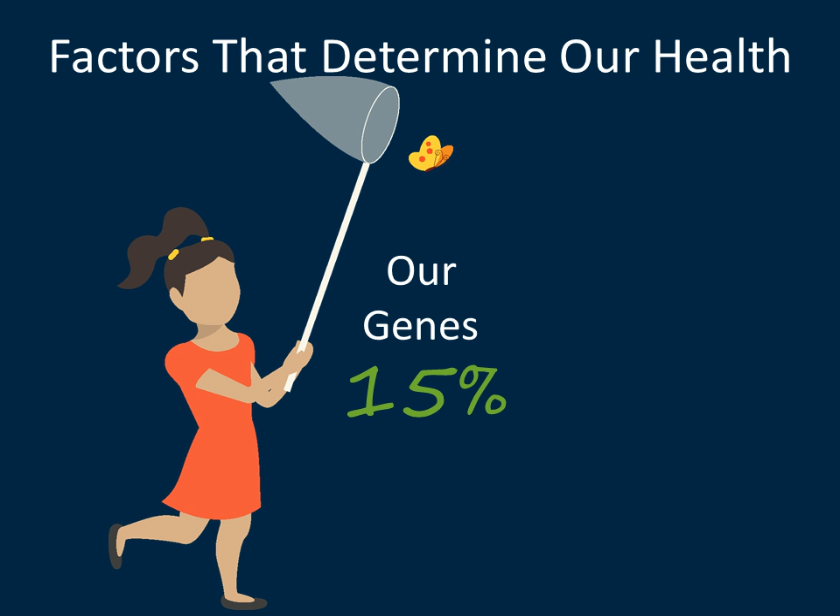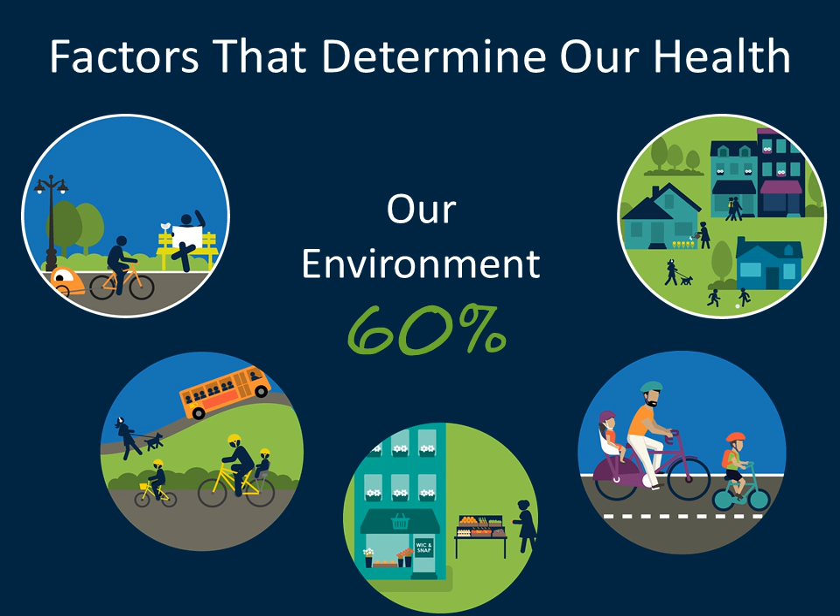When we think about the factors that determine our health, we often think that our genes are largely responsible for our health, but our genes are only responsible for 15% of that which determines our health. However, the environment is responsible for 60% of that which determines our health. Our physical, social, political, and economic environment greatly determines our health. Therefore, our environment greatly shapes our overall health, and complete streets improves our health.

So what is a complete street exactly? Well, in its most basic form, a complete street provides a safe, comfortable place for all road users. So let's take a look at a few examples.

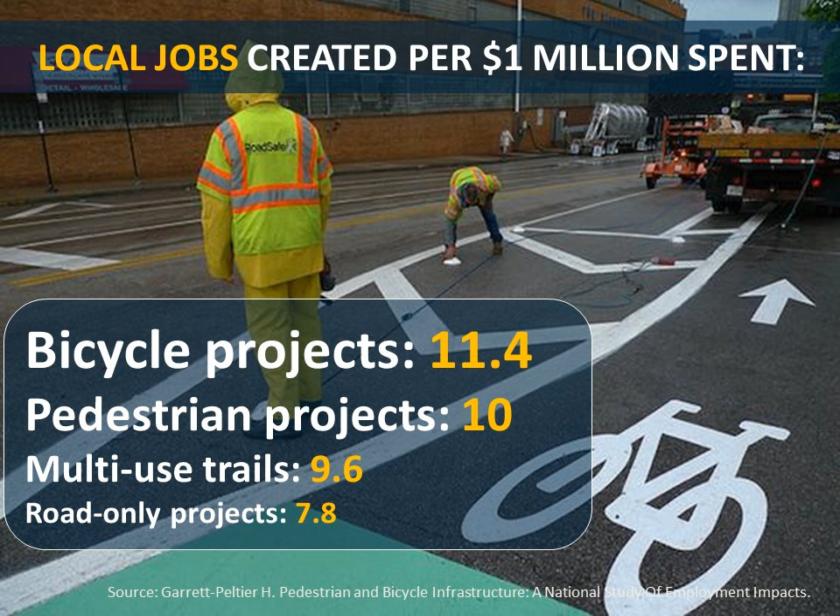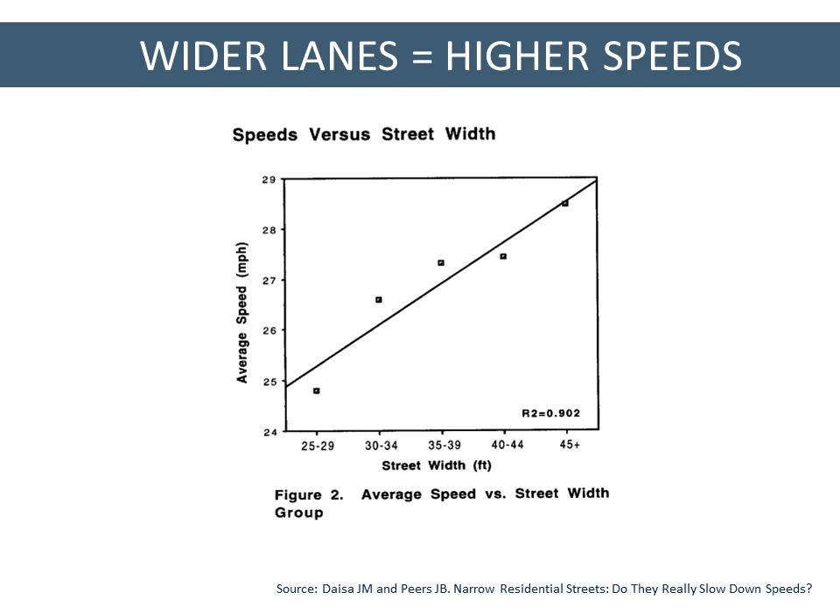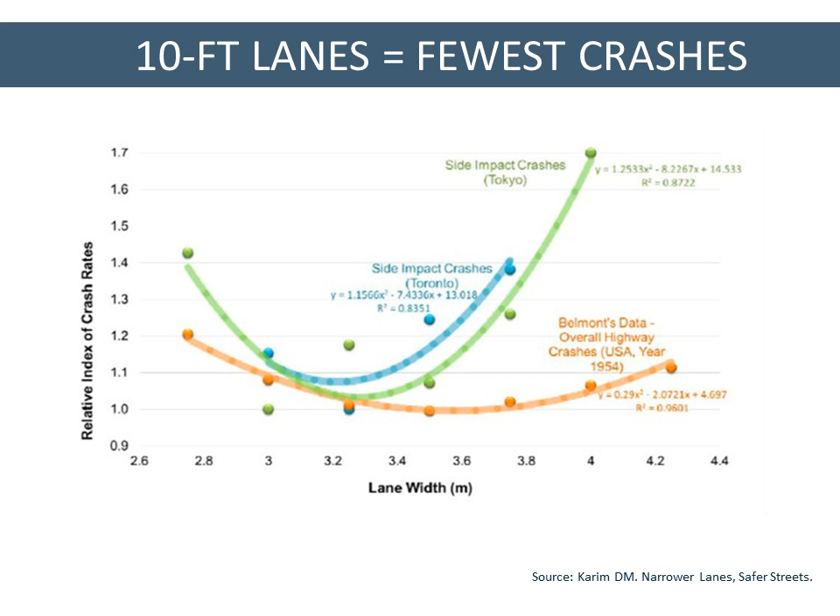Research has also demonstrated to us that wider travel lanes equal higher speeds. In fact, research completed last year demonstrated that about a 10-foot travel lane experiences the fewest amount of collisions.

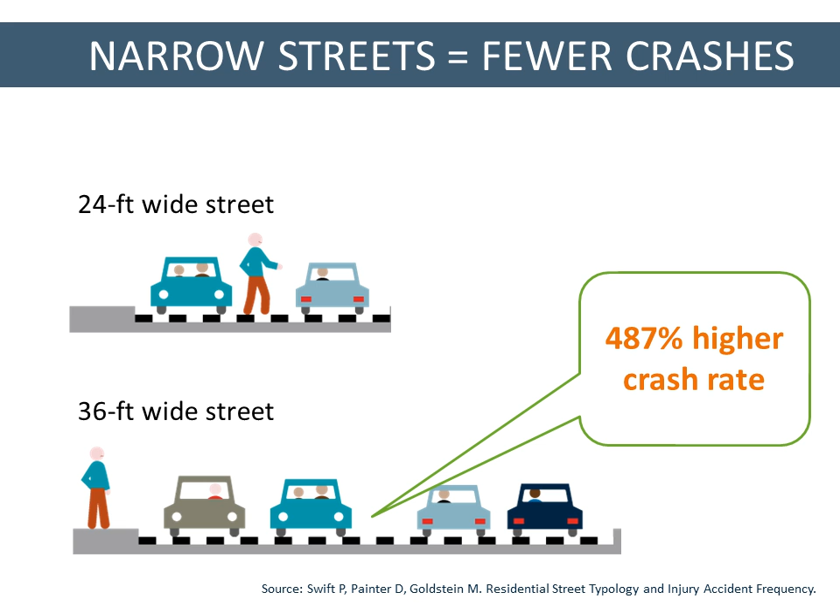Another research study demonstrated that narrow streets also experience fewer crashes. And narrow, slow-speed streets are much safer for people who are trying to cross the street. And I know this very well because I have to cross a 4-lane road every single day when I'm going to work, and it is very challenging to cross that street.

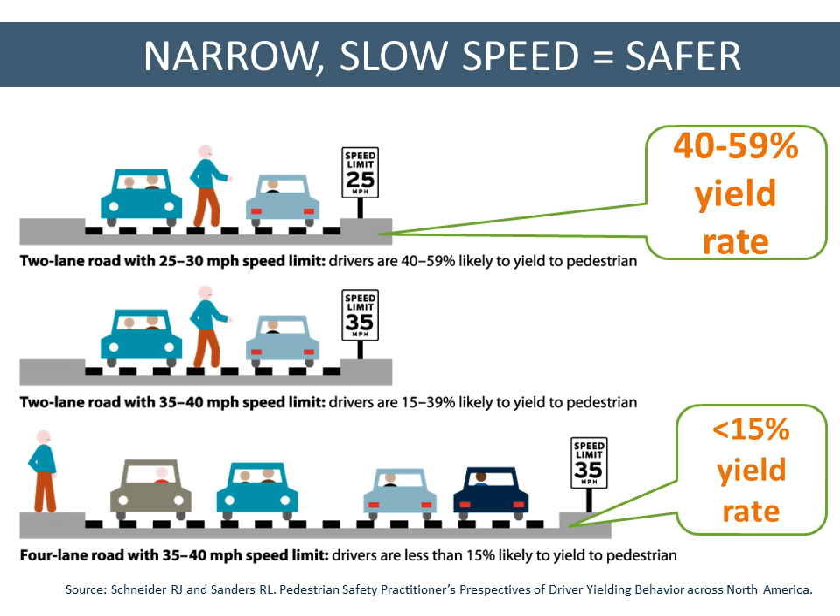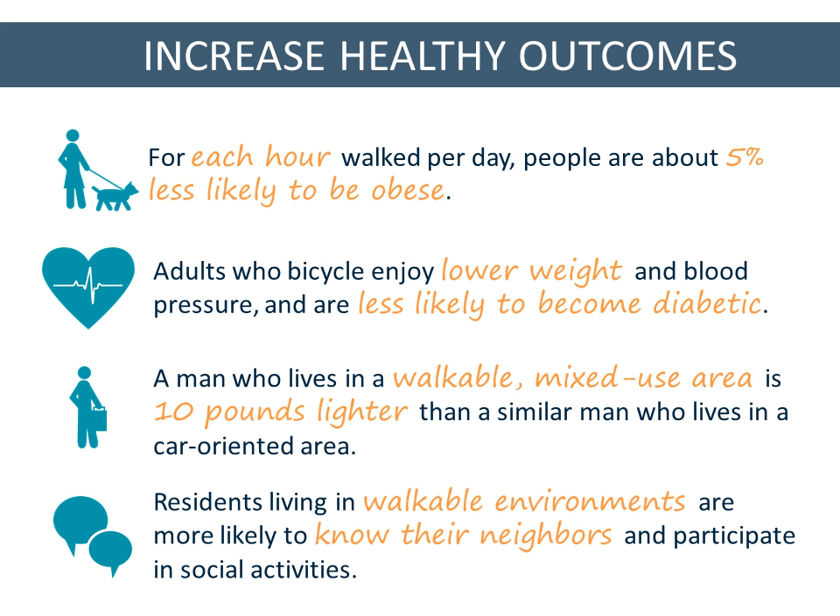Complete streets increase healthy outcomes. If you create an environment that is safe and comfortable for all road users, then people will walk more, bike more, and hence are less likely to be obese or diabetic.

As well, complete streets also benefit people who use transit. And about a third of people who use public transportation to commute to work meet their daily requirements for physical activity simply by walking to and from the bus stop.

Our street network affects our health in very deep and real ways. If you live in an area that has a well-defined grid street network, you are less likely to be obese, have high blood pressure, or heart disease.

Complete streets really is not a one-size-fits-all solution, as we described in previous slides talking about context. It's really about figuring out what is necessary for that particular street in that particular neighborhood. So before I turn it over to Eric, I'm going to briefly talk about Complete Streets policy.

So what do we mean by policy? In general, policies are binding, they're written, and they apply throughout the community. When we look at Complete Streets policies, we most often see them in the form of resolutions, local ordinances, as well as in zoning language, such as requiring bike lanes or a particular width of sidewalk. This is where zoning language becomes very important with regard to complete streets.

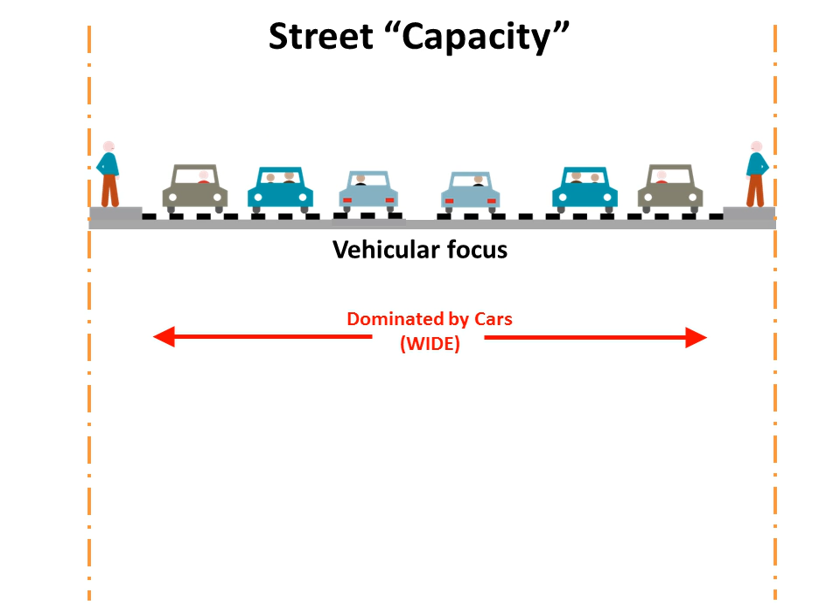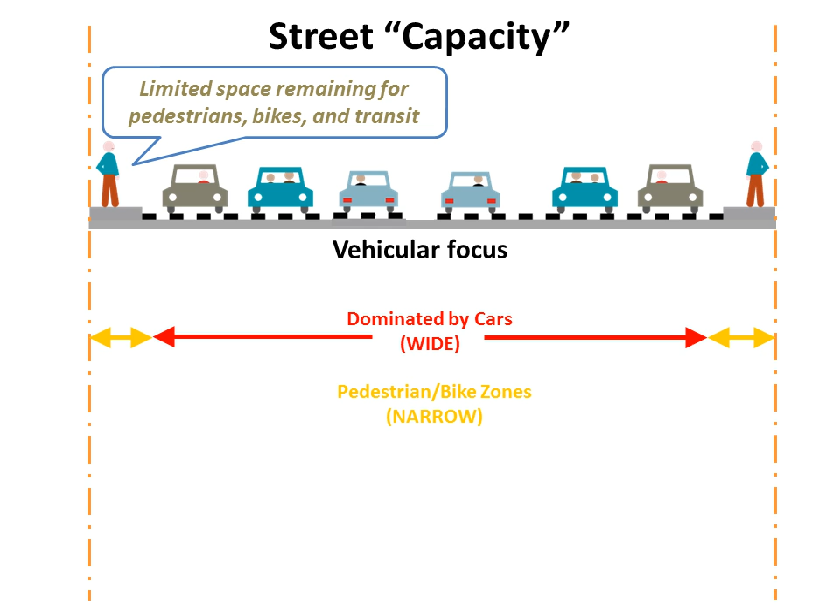Ultimately, though, how many cars a street can accommodate is limited by how much space is available within the right-of-way. So when the focus is on vehicular capacity, that street space tends to be dominated by cars, and the space left over for pedestrians, bikes, and transit is small and squeezed into the remaining space after those cars have been accommodated.

When walking and biking is given a low priority in this way, the pedestrian and bicyclist experience is poor. At a minimum, the facilities are limited and the experience is uncomfortable, and at worst, the facilities are non-existent and the experience is dangerous.

Auto-dominated streets also encourage high speeds and are wide with long crossing distances. As a result, vehicular-pedestrian collisions are more likely in these instances, and we just heard from Diane how high speeds increase the danger of those collisions.

So with complete streets, we look at street capacity differently. We focus on how the street can accommodate all users and modes of transportation within the right-of-way and the space available, and not just cars.

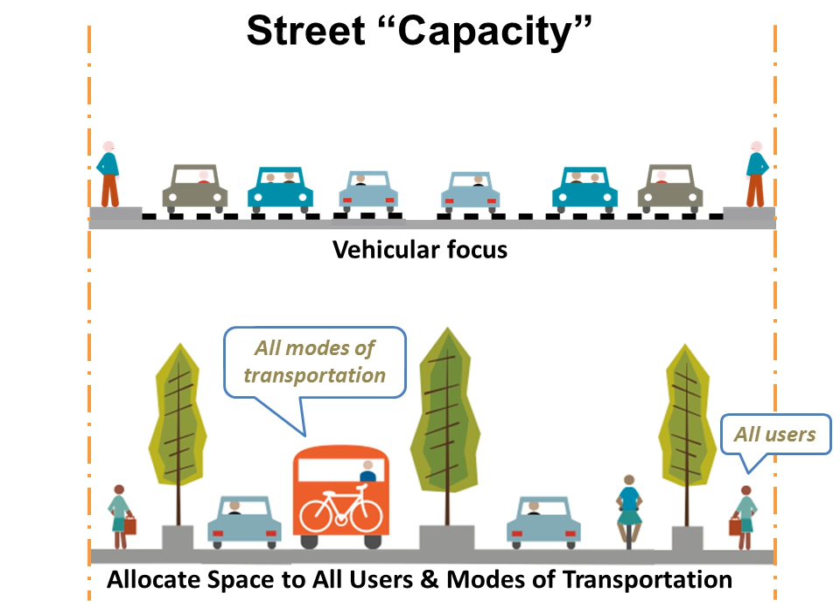So how do we rebalance street capacity to do a better job of accommodating all users? Well, one major way is to reconfigure streets to take some of that capacity away from the cars and reallocate it to other users. We can do this by narrowing or converting travel lanes or parking lanes, and then using the space we free up for improvements such as wider sidewalks, bike lanes, or transit-only lanes.

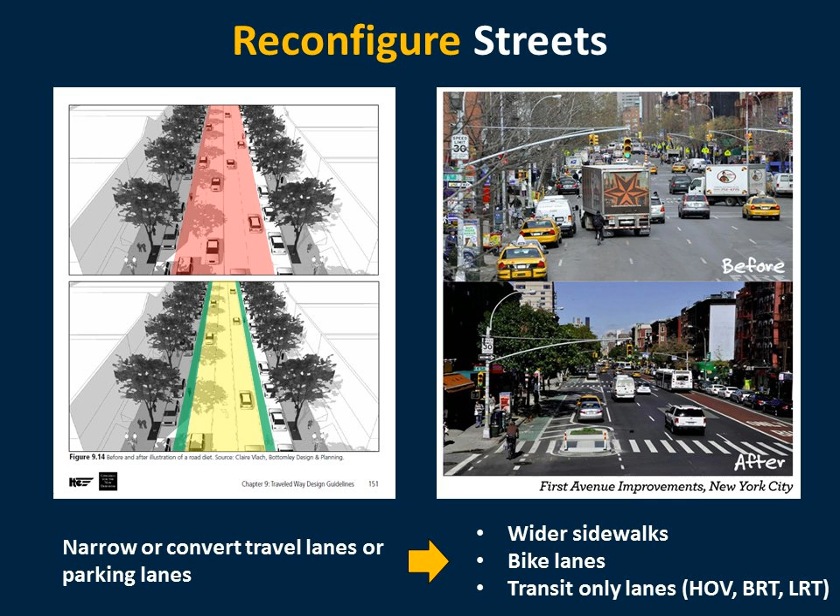And we can see here some examples of before, where we have a completely auto-dominated street, and then after, when transit lanes and bike lanes have been added with some of that auto capacity converted.

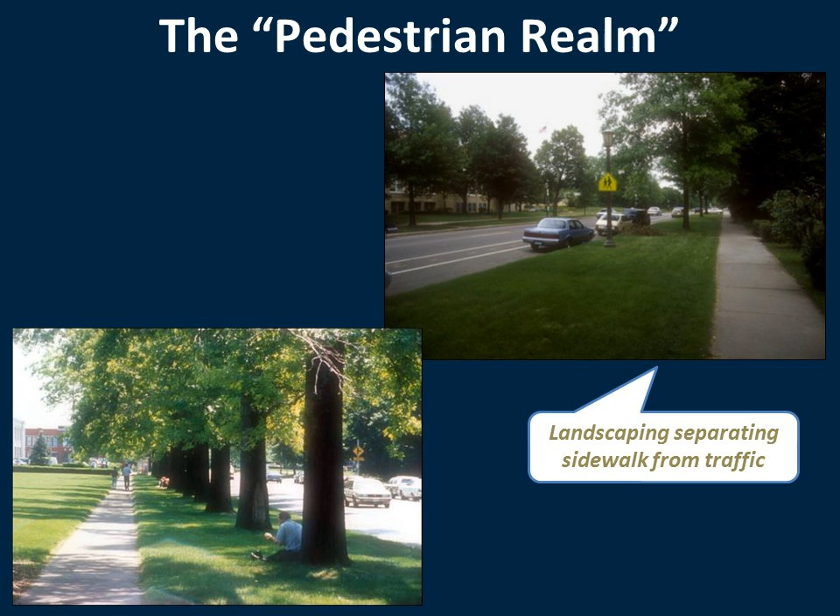Now, whether we reallocate space or not, we can still upgrade streets to improve the experience of various users. For pedestrians, we can do that by creating buffers between the sidewalk and the roadway using landscaping. The greater the separation and the more significant the landscaping, the more of a buffer is created from vehicular traffic.

In more urban locations, the physical separation isn't as large, and in those cases, on-street parking and wider sidewalks, which accommodate more pedestrians, can be used.

Along the most activity-oriented retail or commercial streets, the sidewalk should run closer to buildings to allow pedestrians access to shop front windows and entrances. The sidewalk should also be much wider in these cases to allow the greater number of pedestrians to easily pass each other. Street trees in these locations should be in grates so that the landscaping doesn't cut street parking off from businesses, and those trees generally should have higher branches to allow easy views of shop fronts from the roadway.

The pedestrian realm should also include a variety of amenities, including seating, trash receptacles, pedestrian scale lighting, and human scale details.

Crosswalks are also an important part of the pedestrian experience. Designs for crosswalks should consider locations that make it easy for pedestrians to get to their destination. This includes mid-block crosswalks, especially along streets with long blocks. Crosswalks should be detailed to be highly visible to all, guiding pedestrians to safe crossing locations and alerting drivers to be aware of pedestrians. Treatments include striping, which could be standard or more decorative paving details, signage, and lighting, such as in-roadway flashers.

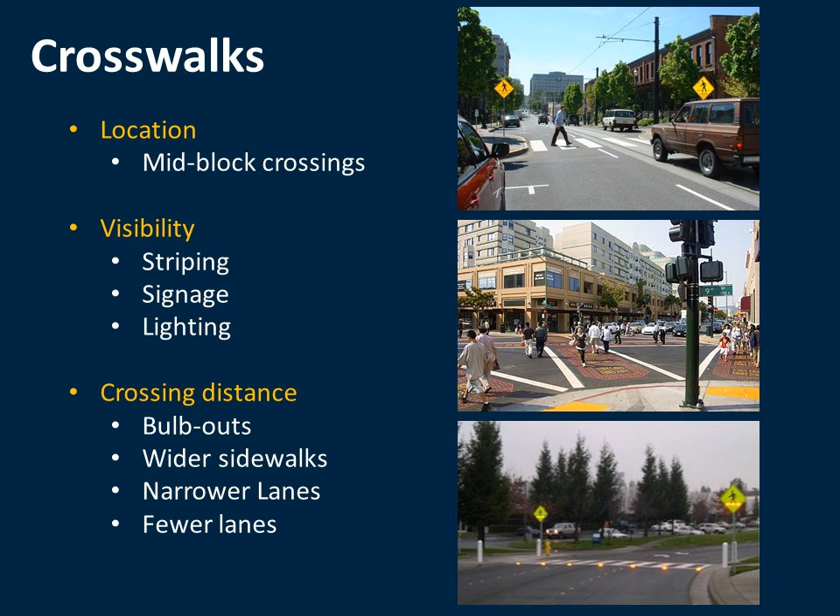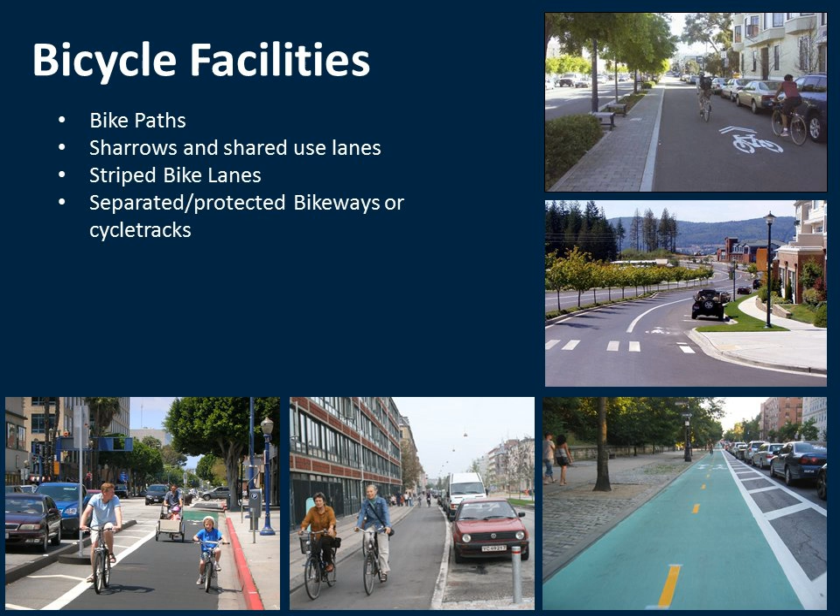Sidewalks are common, but many streets lack adequate bicycle facilities. The equivalent of sidewalks for bicycles include lanes shared by both bicycles and cars, typically indicated with sharrows, striped bike lanes, and protected bikeways, also known as cycle tracks and bike paths. These final configurations create a safe and comfortable bicycling experience by placing wide striped zones, parked cars, curbs, or landscaped medians between the bike lane and adjacent car traffic.

Like cars, when you're out on a bicycle, you want to have somewhere to park when you get to your destination. Bike racks can be strategically located along the curb on sidewalks, and they can also be located in street parking lanes, trading a single parked car for multiple bike racks.

As far as transit, for people to be motivated to use transit other than driving, the transit experience must be convenient and appealing. This includes safe and adequately sized amenities such as bus shelters and benches where users wait for transit. It also includes transit-only lanes for buses, bus rapid transit, or light rail, and these dedicated lanes allow transit to move more quickly and efficiently, making timetables more consistent and reducing travel times.

Now, even when accommodating other users, streets must still accommodate cars, and that means providing places to park. This isn't a bad thing, as we've seen how on-street parking can create a buffer for pedestrians. It also generally acts as a traffic calming measure.

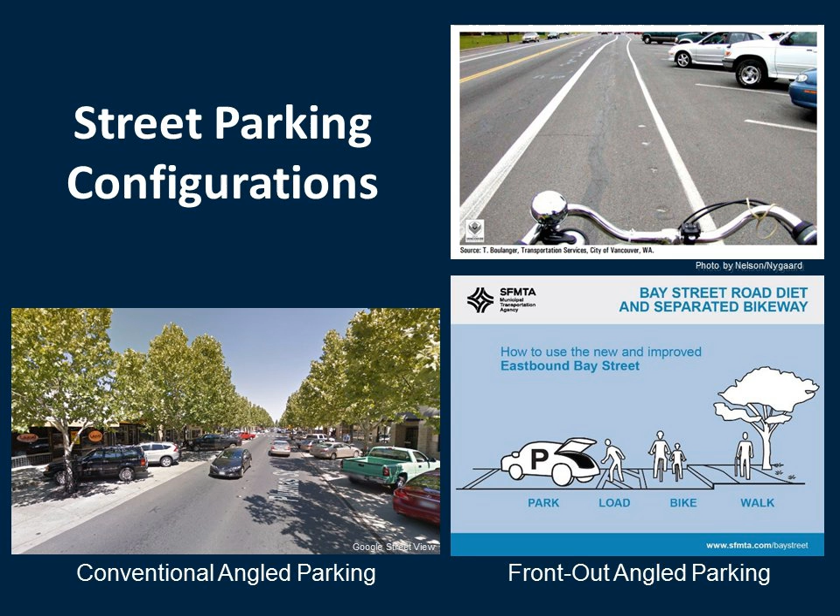Parking can be provided in a variety of configurations, including parallel parking and angled parking. Angled parking is generally easier to navigate, but it can also be a source of collision for drivers backing out of spaces. So more recently, an alternative to conventional angled parking is back-in, also known as front-out angled parking. This configuration has lower collision rates than conventional angled parking because drivers have much better visibility of other cars and bicyclists when pulling out of spaces.

Now, beyond reconfiguring streets to shift capacity from cars to other users, vertical streetscape elements such as trees and streetlights are the most powerful tool to shape the street experience.

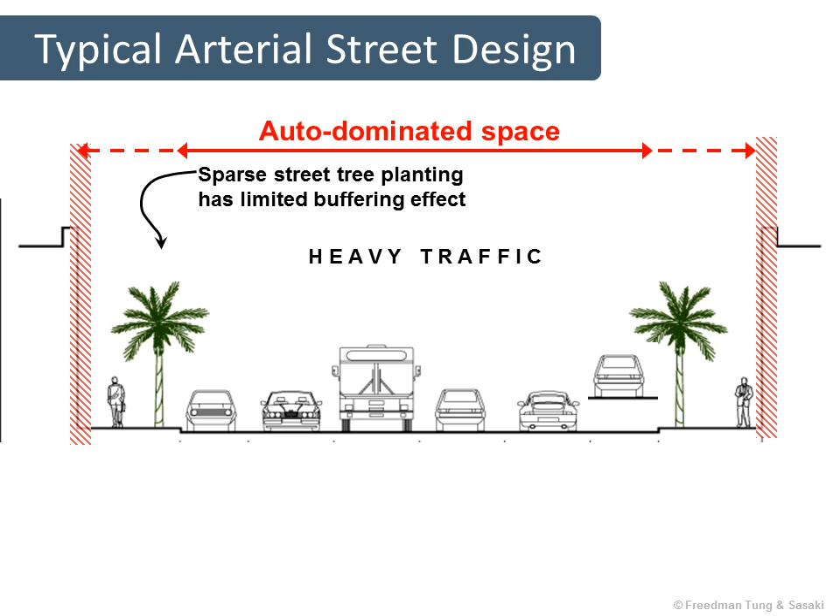This is because when streets lack vertical elements, there's nothing to visually define the space of the street or provide a buffer for pedestrians. So the result will be a space that feels very wide, especially if buildings are low and significantly set back from the roadway.

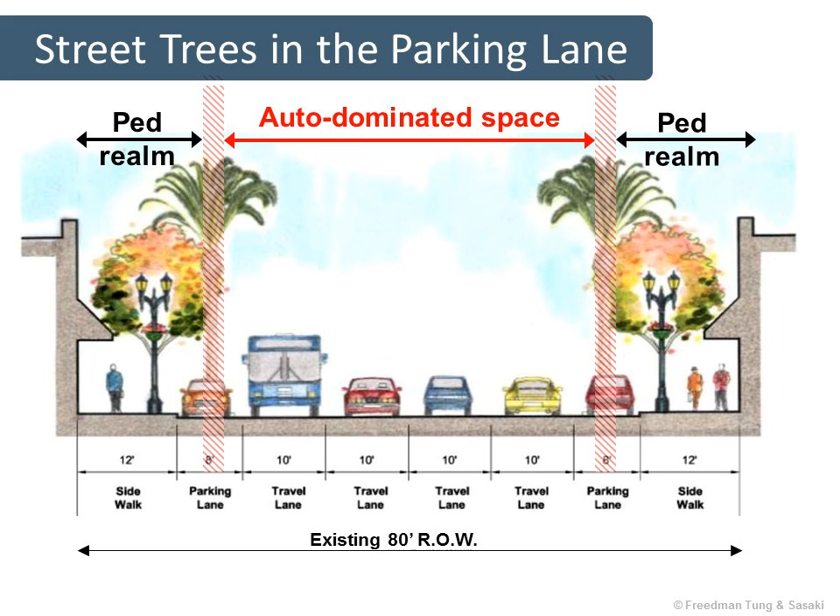Adding substantial vertical elements within the street will change the perception of the roadway even without reconfiguring the space. You can see that this roadway feels wide and the pedestrian space feels squeezed. And here, after placing street trees in the parking lane, it completely changes the perception of the street for the pedestrians, and for drivers as well.

Now, placing trees or streetlights in parking lanes is important to remember, it requires curb islands to help prevent cars from accidentally running into them while parking. And this can work with angled parking as well.

Streetlights can also create this effect, but it's generally not quite as powerful. To be effective, streetlights must be placed closer together.

Another place verticals can have a significant effect is in the center of the street. Wide multi-lane streets often have continuous center turn lanes. Replacing a center turn lane with a landscape median creates a dramatic transformation.

Landscape center medians also create safer streets. They reduce collisions by reducing conflicts caused by turning vehicles, and the visual narrowing contributes to slower speeds. Note that some transportation departments have standards for the placement of vertical elements close to travel lanes and near intersections, due to how they affect the visibility of oncoming traffic.

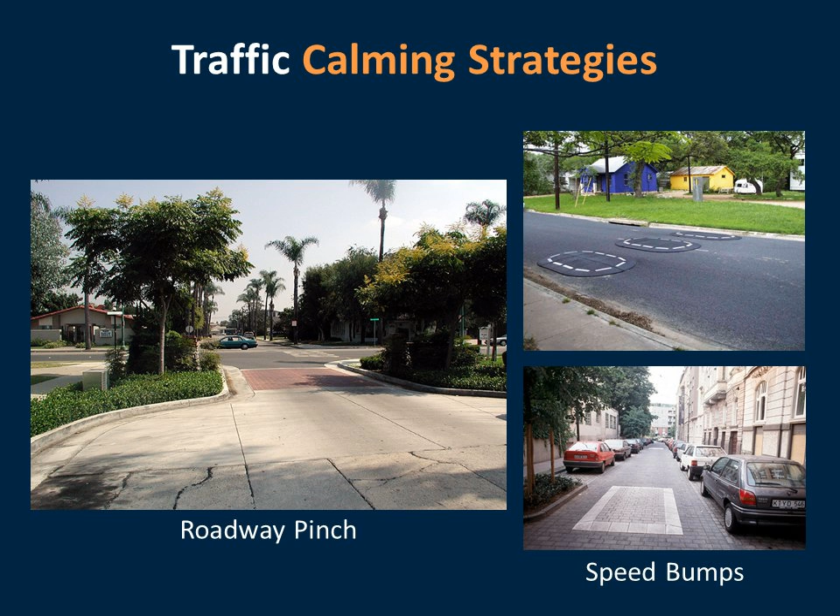Additional traffic calming strategies include a variety of elements that require cars to slow down to navigate past them. This includes roadway pinches and speed bumps, as well as visual and physical elements in the center of or along the sides of a roadway which create lane shifts or perceived barriers.

Now, which design elements are appropriate in any situation depends on the function and the context of the street. Street design must coordinate the needs of anticipated vehicular, transit, bicycle, and pedestrian users, and also consider the buildings and land uses along the street.

So in areas that have high pedestrian activity, you might want slower traffic and bike lanes for a wide variety of users. And then in other locations where there's a lower density of pedestrians and bicycles, there may be less of a need to accommodate those users as strongly.

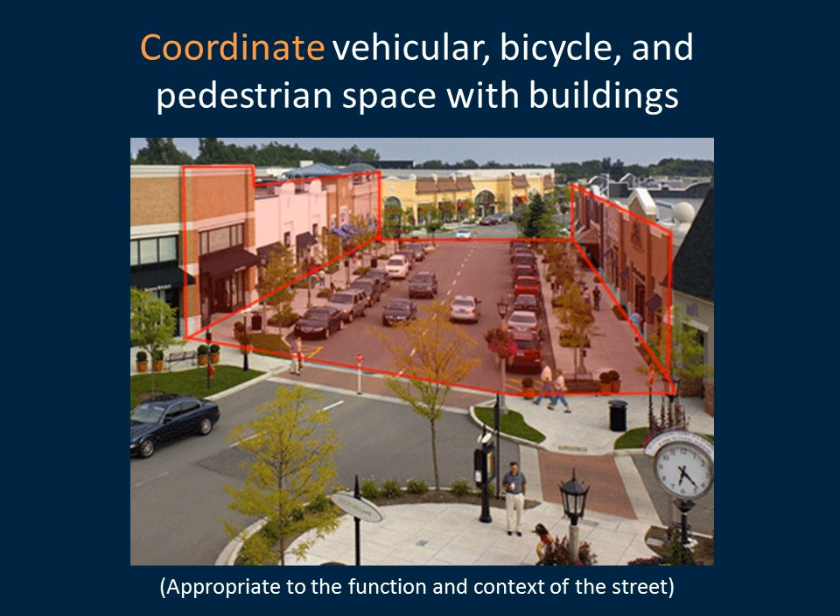Complete streets should also serve the community's vision for that street, neighborhood, or district. Creating that vision requires bringing multiple sectors together, such as planning, transportation, police, fire, economic development, and health departments, as well as engaging the community.

It's about getting people to the table to identify their needs and priorities, coordinate work across sectors, and develop complete street solutions to those issues.

Now, it can feel daunting, but there's a wide variety of resources available to provide guidance on designing complete streets. The National Association of City Transportation Officials has an Urban Street Design Guide and Urban Bikeway Design Guide, and this provides detailed coverage of complete streets design elements.

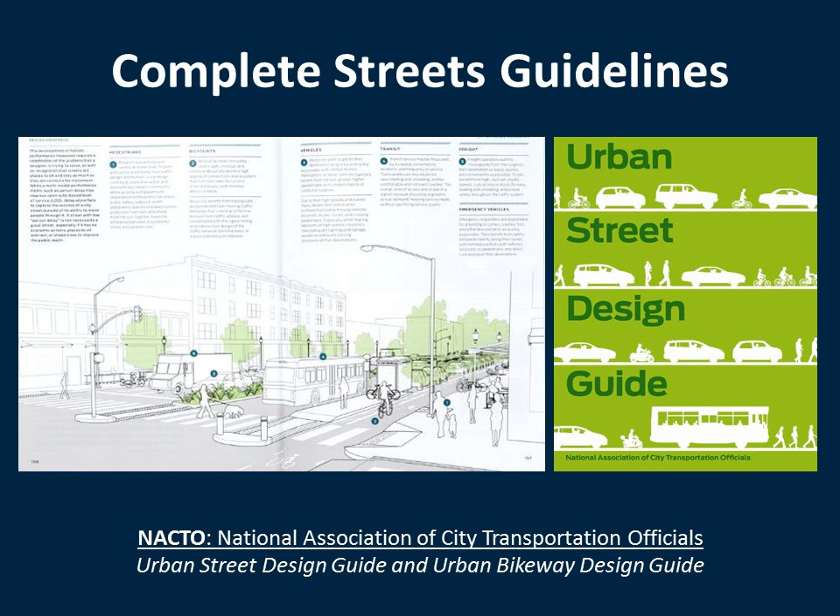The Institute of Transportation Engineers, in collaboration with the Congress for the New Urbanism, has a Designing Walkable Urban Thoroughfares Guide, a context-sensitive approach. This includes comprehensive guidance on Institute of Transportation Engineers approved approaches for planning and designing complete streets.

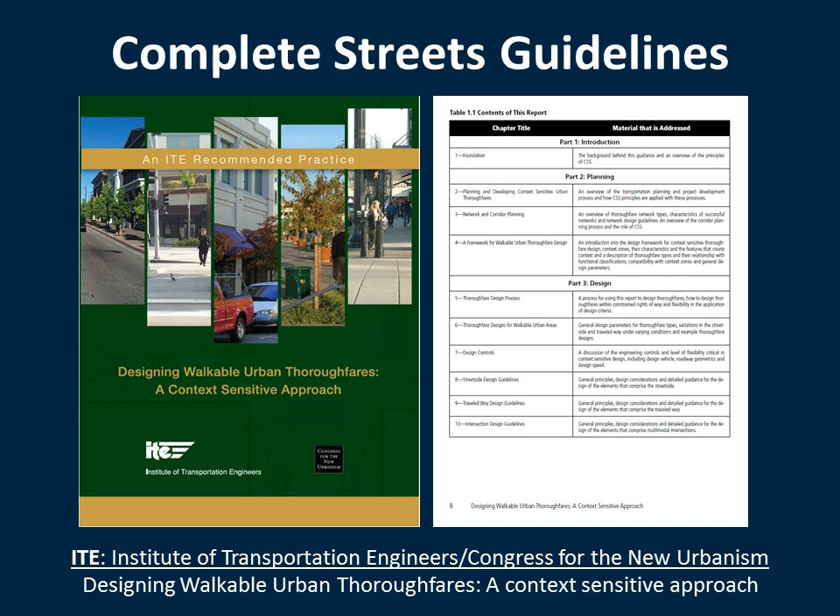And the U.S. Department of Transportation's Federal Highway Administration Guide has a series of useful tools to select pedestrian and bicycle safety design elements in response to identified roadway deficiencies. And there are a wide variety of other resources that can be found online.

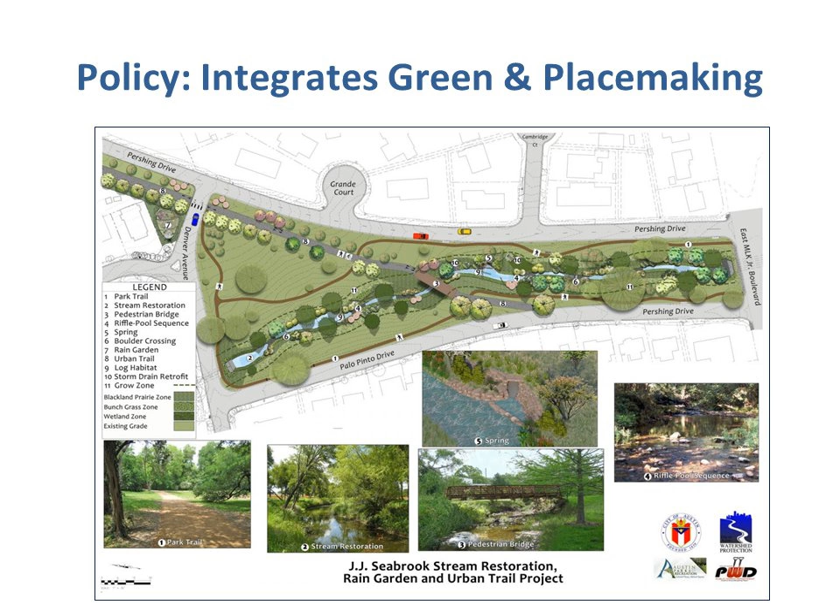We also are looking to incorporate more green space as a placemaking mechanism. This is an example of a project under construction right now. You can see there's a shared pedestrian transit bikeway running through the middle, a rain garden, a pedestrian bridge, and just having more spaces like this in the middle of the city, to not lose that, to incorporate more nature into our built environment.

So our Complete Streets policy centers around mobility, focuses on urban design, creating green streets. Something that's really helped propel this Complete Streets movement is our comprehensive plan, Imagine Austin, that came out in 2012.

Some of the priority programs include investing in a compact and connected Austin, sustainably managing our water resources, using green infrastructure to integrate nature into the city, as I showed before, trying to grow Austin's creative economy, and developing and maintaining household affordability, which is a huge challenge. It created our Healthy Austin program, and through this we hope to revise our development regulations and processes so we can realize this vision of a more compact and connected city.

What we see as the benefit to having this compact and connected city is public health benefits, improving our transportation system, environmental sustainability, social justice, economic well-being, and affordability.

So we define our complete streets through these 8 principles. Complete streets serve all modes and users, taking them all into consideration. A complete street requires a connected travel network for more route options. Complete streets are beautiful, interesting, and comfortable places, places you want to be, that attract people. Complete streets require best practice design criteria and context-sensitive solutions.

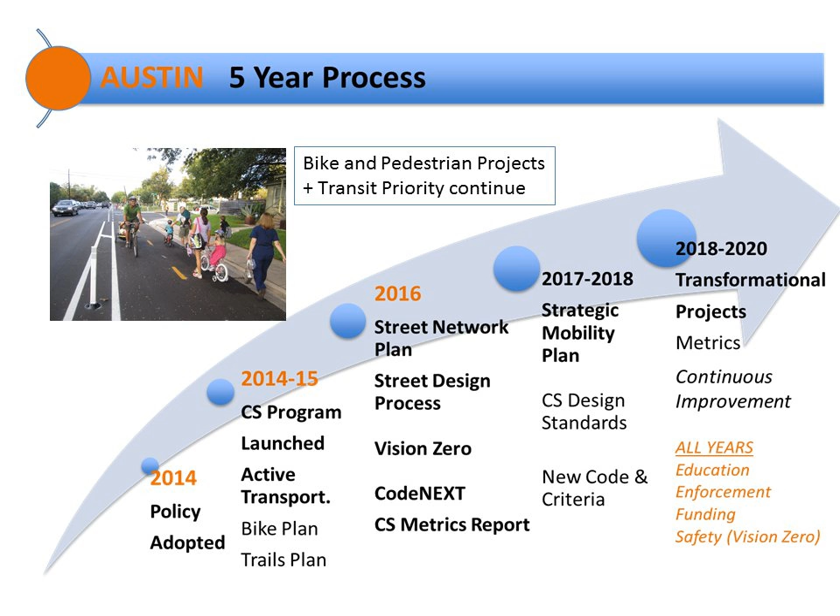And then we've got a plan going forward to continue this Complete Streets movement and really realize it here in Austin.

Eric mentioned NACTO before. NACTO is a really tremendous resource for how to implement these complete streets, with different tools for implementing them. There's an urban street design guide, a bikeways design guide, and at some point there will also be a transit guide, which should be really helpful.

So now I'm going to give you some details on a few projects I really feel showcase complete street elements here in Austin.

So a few details on the project. Like I said, it's an entertainment and tourist area. The scope hoped to incorporate a new bicycle lane and rapid transit stations. Some special features include stormwater treatment channels, which I'll show pictures of, as well as pedestrian bulb outs with bicycle racks for easy bike parking upon arrival. This was one of our first implementations of reverse angle parking, or that front-out, back-in angle parking that Eric mentioned earlier. The next steps would be to extend the bike facility and expand our bike network.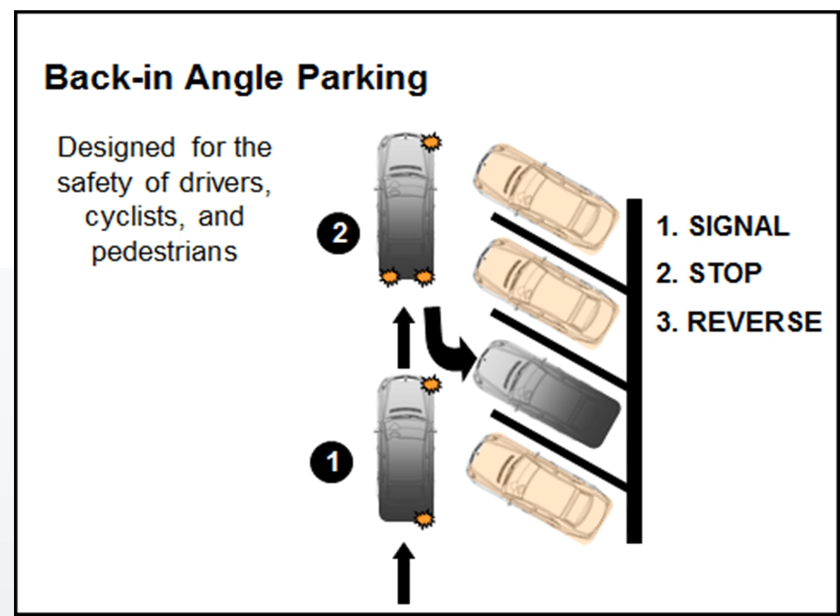Again, I mentioned the back-in angle parking. It's been shown to be safer for all modes—drivers, cyclists, pedestrians. The fact that the car pulls out of the parking spot the way it does gives drivers the visibility to look to the left and see a bicyclist coming. In this case, we actually do have the bike lane right alongside that back-in angle parking, but it seemed to work really well.

There's a big demand for parking down here too, and this particular section of South Congress is a very steep hill. Since we needed back-in angle parking on both sides for the stakeholders, we have a bike lane on the uphill portion and a shared lane coming back down on the other side. When the parking demand tapers off, we're able to do parallel parking on one side and back-in angle parking on the other.

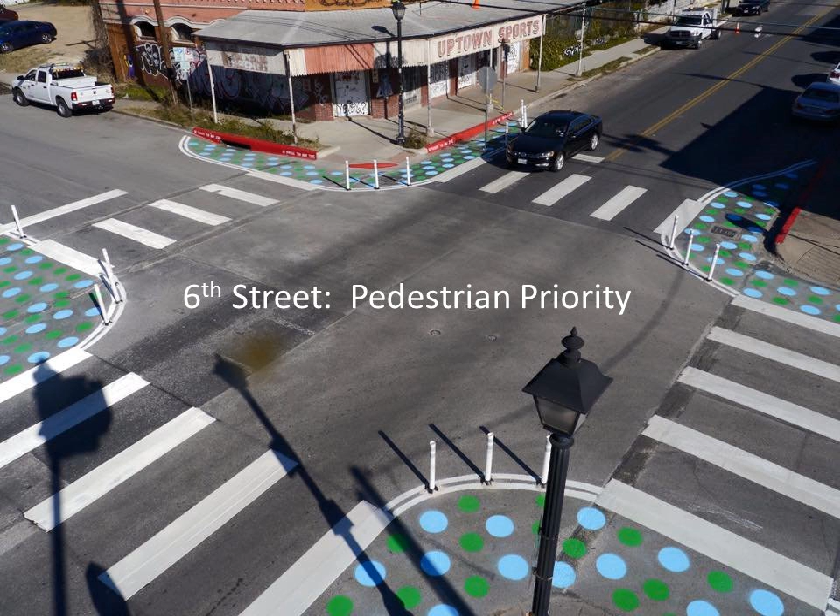Yeah, there's a wide variety of ways to do that. It partially depends on the project you have. In some cases you might have a land use plan going on, like a downtown revitalization plan, and street design and experience is one aspect of that. In other cases you might have a city's complete streets policy, where the city identifies specific streets for improvement. A variety of community workshops or surveys can be used to ask questions of the community about their experience in the location you're focused on - how do people experience this street, what problems do they see, and what would they like to see in this area?

And then to bring back in a series of workshops or surveys ideas about how to address those deficiencies and issues, in order to get feedback on did we hear it right, and what do you think about this solution, as well as to bring information back to the community about how those solutions address their issues. So sometimes you really need to respond to the community if they have concerns from a data perspective, how does it work? They might have concerns about how it works, in which case you need a technical expert to talk about traffic engineering. If you have a question about what it might look like, you might have to develop some visualizations to help people visualize what it looks like. So it really depends on what part of the process you're in, but it's a whole process from asking questions.